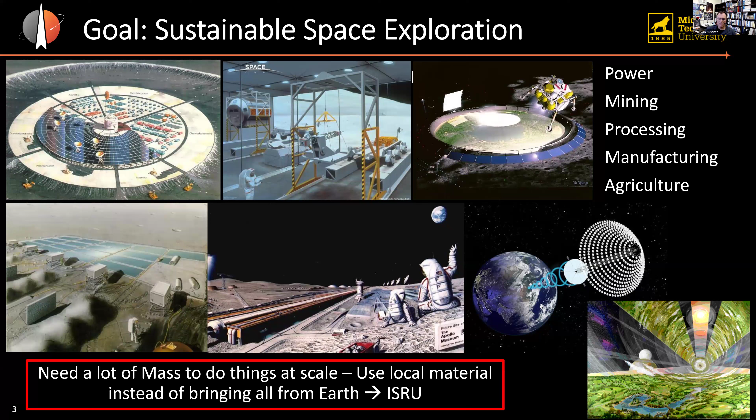And so to do that, we need to mine things, we need to extract things from it, process it, we need to manufacture components, and then of course, if we have permanent human presence, it would be great if we can grow our own food in those places as well. So lots of mass is needed to do all these activities that people envision. And so using the local materials is what we then call in situ resource utilization, or ISRU.

And of course, the activities that we're talking about are happening on the moon, but the first business is, of course, to get to the moon. There are lots of activities in that area taking place, lots of rockets being developed, lots of companies getting involved in the Artemis Accords and things like that. So the transportation side of things is a very active field, and lots of interesting things happen there.

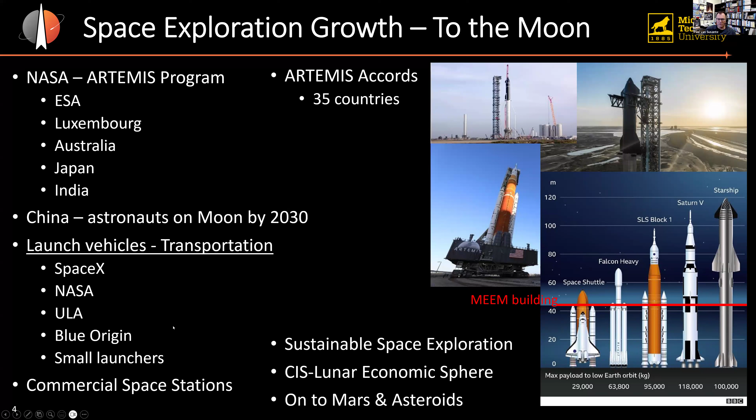I haven't personally seen Starship launch, but I always like to compare these massive rockets to the height of the tallest building in my area, which is the building I actually work in, and that's this red line. You can see these rockets are almost 3 times as tall as the tallest building in the area here. These are massive machines, large cargo capacity, very different in many ways than the small things we used to be able to launch to different places. So this is going to change the game in many ways.

Now, the sustainable part and also the economic part of that is always predicated on whether or not there is value to be had in those places. And value can be defined in several different ways, but the value of in situ resource utilization, I think, is often best expressed in sort of three different components.

One being independence, right? So think of it as a supply chain, and the supply chain now is shorter because you can make stuff locally. And in turn, that also means there's risk reduction because the supply chain is shorter. So if, for example, there's a leak in some sort of oxygen tank, and you'd have to wait 9 months for replenishment, that could be problematic.

But if you can just make some more, that greatly reduces risk for the mission and the people. So I think risk reduction is a huge one as well. And then in the long term, you also improve life on Earth by moving a bunch of industry off the planet.

But I think from a sustainability standpoint for the space program, I always like to think of it as money equals number of rockets launched, in a way. So if I have to launch fewer rockets, that means it costs less and I can do more for that program.

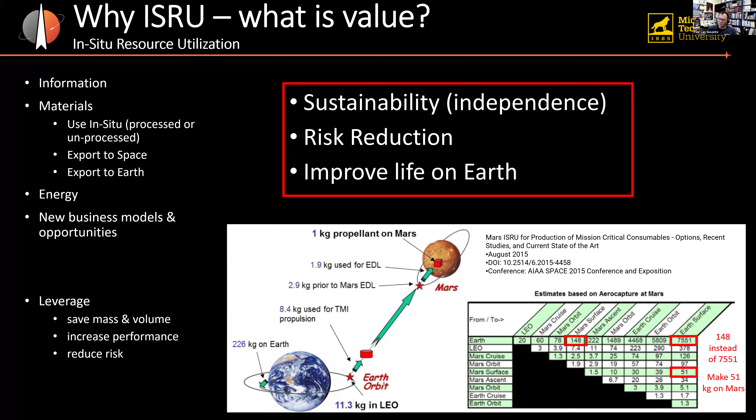And so that's where the sustainability part comes in. If I can make 51 kilograms of propellant on Mars, I can send that 1 kilogram back to Earth with material made on Mars. That saves a lot of rocket launches from Earth to then send it back from Mars. So that to me is really the value of ISRU — you greatly reduce the number of rockets you have to launch from Earth to go to other places in the solar system.

Then we're talking about rocket propellant, because propellant is the largest mass of the rockets. That's the delta-V needed to get to other places in the solar system, and it's the biggest mass of any rocket, basically. So where can you find that water?

Well, on the moon there are some cool places — literally very cool, in the sense that they're in the permanently shaded regions on both the north and south poles of the moon. In those places the sun never shines, and so they've accumulated water ice over the millennia and billions of years. That ice is in those permanently shaded craters. There, we could potentially extract it, electrolyze it, and then we have rocket propellant. So that is one of those near-term sources we could use to reduce the supply chain from Earth.

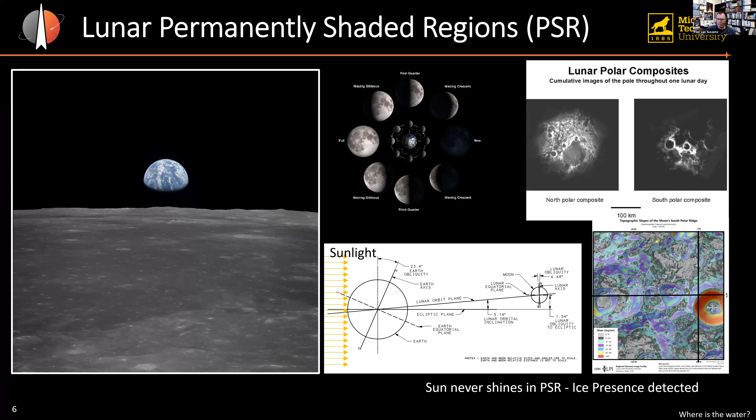Now, what value does that have? This is a plot from a study called the Commercial Lunar Propellant Architecture Study, done by ULA and others, including Colorado School of Mines. They studied the value of a kilogram of water from Earth in different places. If you have a value of water on Earth, it's very little, but depending on where you have to bring it, it costs a lot to bring it there, so the value of 1 kilogram of water goes up.

For example, on the moon, if I bring water from Earth, this study says it would cost $35,000 a kilogram. But if you can make it locally, this study says you can make water for $500 per kilogram. Look at that difference — that's a huge value proposition for a company. If I can make it for $500, and the value of bringing it from Earth is $35,000, let's say I sell it for $20,000. I still give NASA a discount of $15,000 a kilogram and still make $19,000 in profit, so to speak.

So this is why companies are very interested, and this is what the value of propellant is in many ways. Of course, the value changes depending on the location, because the cost from Earth is also different, so you need to take that into account if you want to sell it in other places.

But this is a huge thing, because if we can make propellant on the moon and then either bring it to other places and refuel, that allows us to not be limited to the supply chain from Earth and getting out of that huge gravity well. There's some very interesting things that allows. In a way, I like to think of it as it opens up the rest of the solar system. It really breaks down the limitations of the mass that we can send to other places.

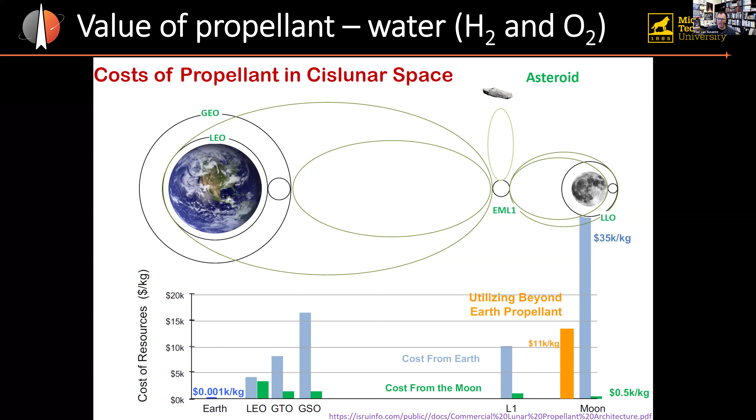Now, when you look at this at scale in the future, what does the growth need? We launch one rocket a year, a hundred rockets a year. NASA and others have studied these things. When you look at the future, we're talking about hundreds of tons, thousands of tons a year, and distance traveled of thousands of kilometers per year for the vehicles that need to do the excavation, et cetera. So we're talking very large scale.

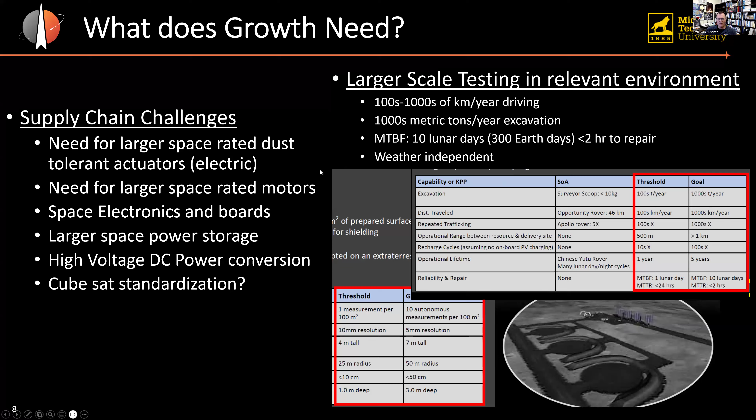And the challenge with that scale is that it's very different from what we're used to doing in space. For example, if you look at the space rovers that have gone to other planets and driven around on those planetary bodies, you can see on the right plot here that the Opportunity rover in 14 years drove about 45 to 50 kilometers. That's a nice distance, but it's not anywhere close to thousands of kilometers.

When we did some analysis on Mars and how we got water from rock, depending on what kind of material you were excavating, you may have to drive thousands of kilometers—in this case 1.5 years. So if you compare that 50 kilometers in 14 years to, let's say, 5,000 in 1.5 years, now we're talking orders of magnitude difference in how much performance the vehicles need to have.

Not to mention, these vehicles are literally digging in the dirt all the time, versus these science rovers that drive around very quietly, carefully, and touch maybe something here or there. They're very different kinds of vehicles, and those excavators that drive very long distances are what we're going to need to make this kind of future possible on the moon.

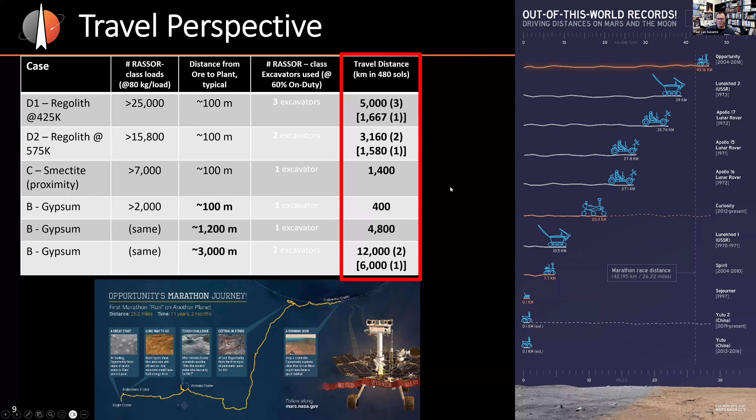And so this is where we get into what we do in my lab, because my lab was founded in 2019, and the goal here is to prototype, build, test, and quickly increase the technology readiness level of technology being developed to enable lunar and Mars missions, and then sustainable space exploration as I just talked about, and partner with whoever is interested in making that possible.

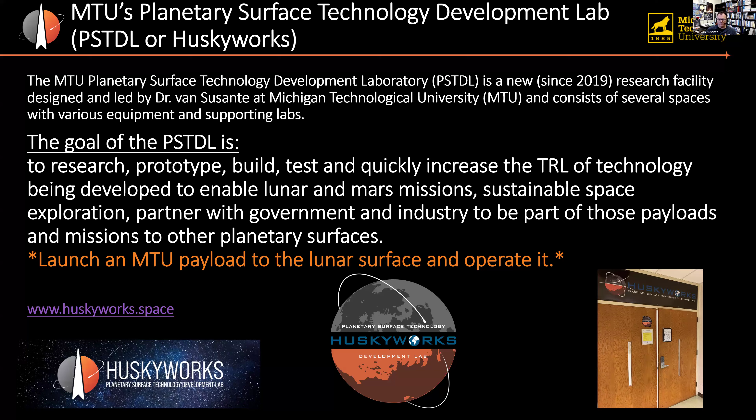And hopefully, by doing so, we would love to have our own Michigan Tech payload on a future mission sometime. One of the things that should be clear from this undertaking is that there are many different aspects that need to be developed, and we in my lab can't do all of those things, obviously, so we focus on some subtopics.

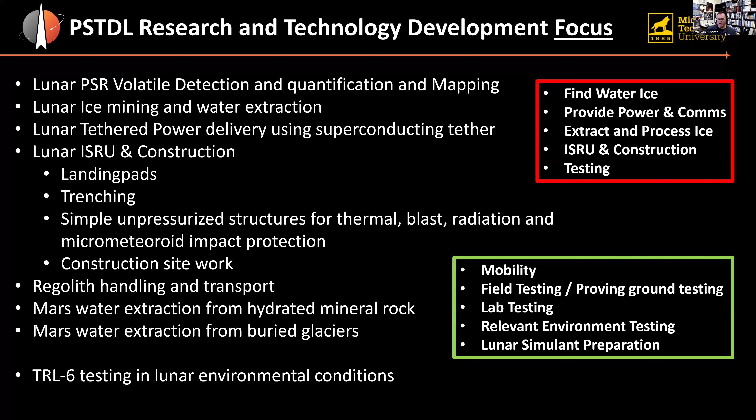For example, we focus on finding water ice, providing power and communications, extracting and processing the ice. We're doing in-situ resource utilization and construction—picking up the material and doing stuff with it. And it's very important to test these technologies. There's a variety of different things you need to be able to do that: mobility, field testing, lab testing equipment, relevant environment testing, and then, of course, to simulate the moon, you also need the lunar environment and lunar simulant.

In my lab, we focus very much on TRL 1 to TRL 6, so all the way from the idea to testing it in a relevant environment, a space environment, before you would send it into space. We do a variety of things, particularly in-situ measurement of volatiles and geotechnical properties, very important as initial missions to map where we could do excavation of ice, where the ice is, how much is there, how deep it's buried, and how hard it is to get out.

And if you know that information, you can design better excavators and material handling systems. You've got to do construction and compaction if you're going to build roads and landing pads for that permanent presence, the infrastructure you need to do these things.

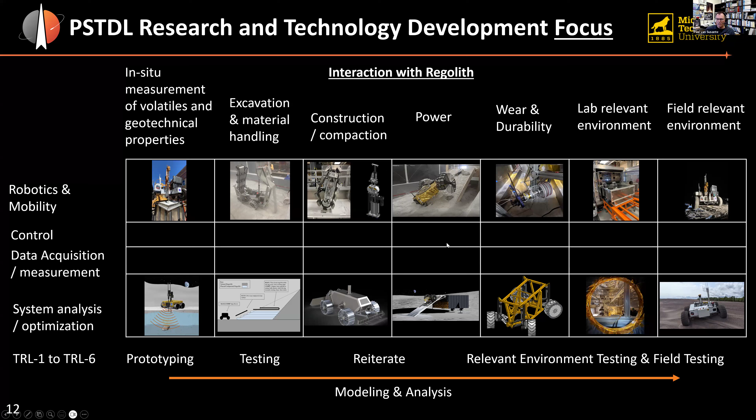We do that testing in the lab in the relevant environments, but we also do it in the field. There's a variety of different things we've been working on, and these pictures you see are all from our tests here.

And of course, we partner with a lot of companies and other universities along the way. In total, we've been able to get about $5 million in funding over the past several years to do a lot of different projects.

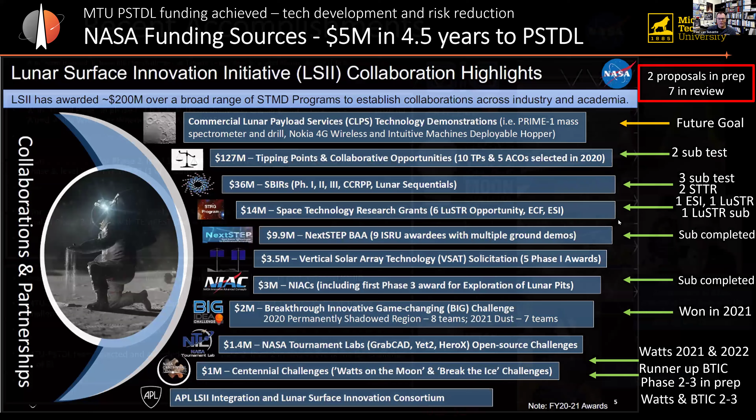We're now three rounds in, and in the final round of Watts on the Moon. Likewise, for the NASA Break the Ice Challenge, the Centennial Challenge, we're also now in the final round of that competition. Both will happen this summer. This has given us about $1 million in prize money and winnings to further develop these technologies, both for power storage and transfer, as well as excavating cemented icy regolith. I'll talk more about those in a bit.

My lab consists of many different people working in it. So I'm talking to you, but the accomplishments I'm describing are done by a lot of students. I have 35 funded undergrad and grad students, and sometimes students who work for credit as well. I have 2 research engineers working in my lab, and we take a very interdisciplinary approach, including computer science, electrical engineering, geological mining engineering, civil engineering, et cetera.

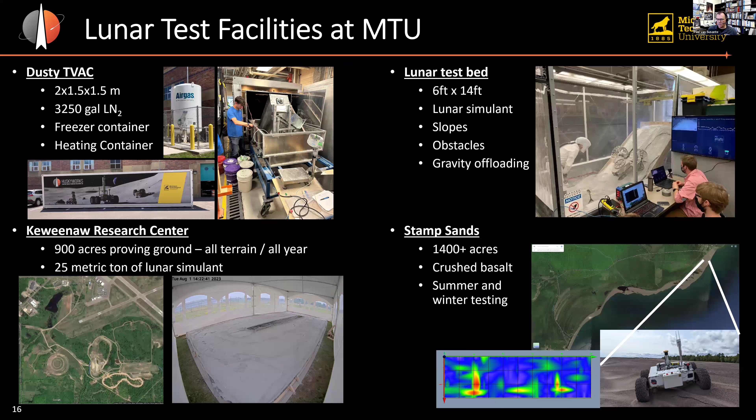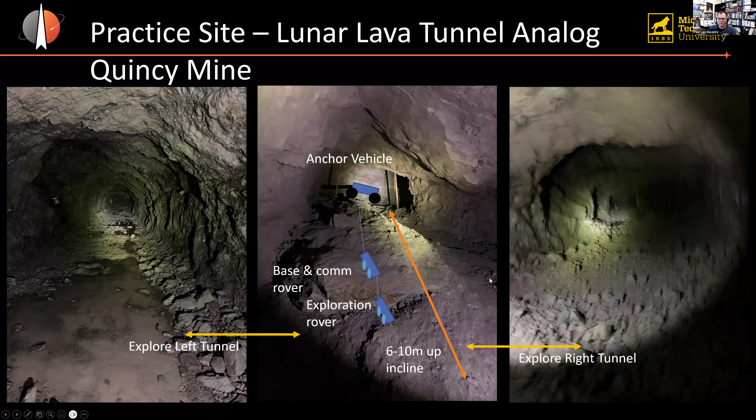It's a pretty exciting underground lava tube alternative where you're not in a national park, so you don't have to be very careful — you want to put a rock bolt in, no problem. It's also safely inspected because it's open to tourists, so it's a very safe, well-known place to work.

Here you can see some other things. This area is at a slope, so you could have an anchor vehicle and drive your vehicles down in it. There's some interesting things we've been working on to explore underground facilities that way.

A little more detail about some of these things. The Lunar Simulant Sandbox isn't huge, but it is a nice size — 14 foot by 6 foot, and 1 foot deep. We can do excavation testing with our Lunabotics rovers, for example.

In this case, we had built a slope simulating a crater slope where we would be driving down, and this vehicle can drive down a 45-degree slope over obstacles like this while deploying a cable behind it — in this case, power and communications. You can see some more testing going on here.

The other capability this sandbox has is a gravity offloading system in place, so that we can simulate lunar gravity in the somewhat limited way of gravity offloading, but it still does a pretty good job with the traction side of things.

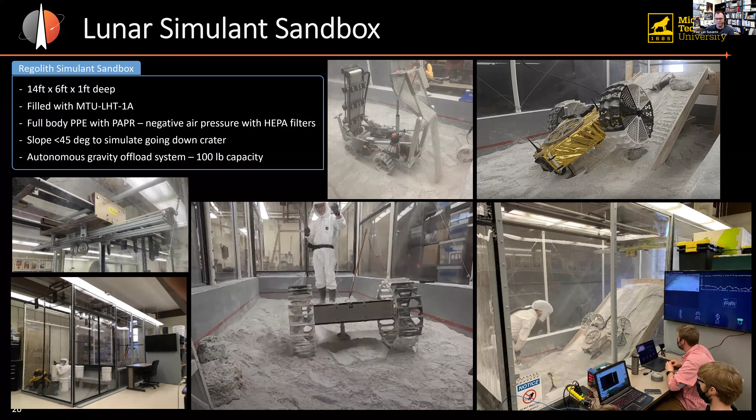Now, this, of course, is in an atmosphere — still a relevant environment relating to the simulant. The traction and other kinds of tests, like obstacle stability and things like that, are pretty interesting to do tests in 1G with.

Nevertheless, it gives us a good idea of how the vehicles behave in lunar simulant. This is a very important thing because, for example, in the Lunabotics competition, one of the major challenges is for the vehicles not to get stuck. So we can practice that in the simulant, and it helps a lot in the final performance of the vehicle.

Like I said, we need simulant, and we needed a lot of it, so about 30,000 to 35,000 kilograms. So we made our own using the same ingredients as, for example, Exolith Lab, or whatever it's renamed now, what it's called.

So the green spar, 90 and 250, and we had crushed basalt that we mixed in, and the green dots here are the resulting particle size distribution, which is right in between the Apollo sample particle size distribution. So we have a very nice particle size distribution. They are all crushed materials, so angular as well. It has very good geotechnical properties. But the nice thing is we can make it for about $3 to $4 per kilogram, so that allows us to keep the cost manageable.

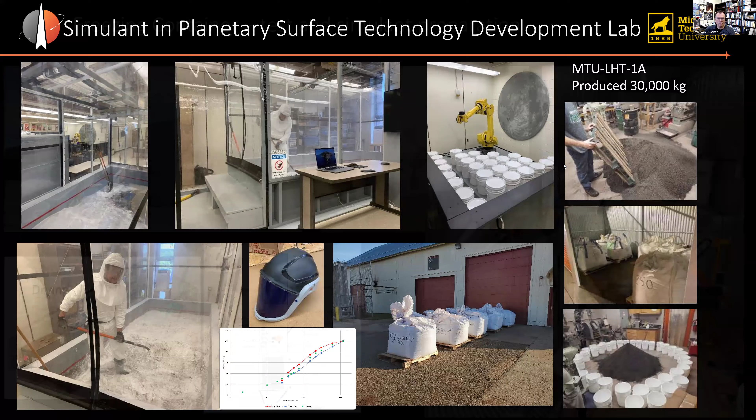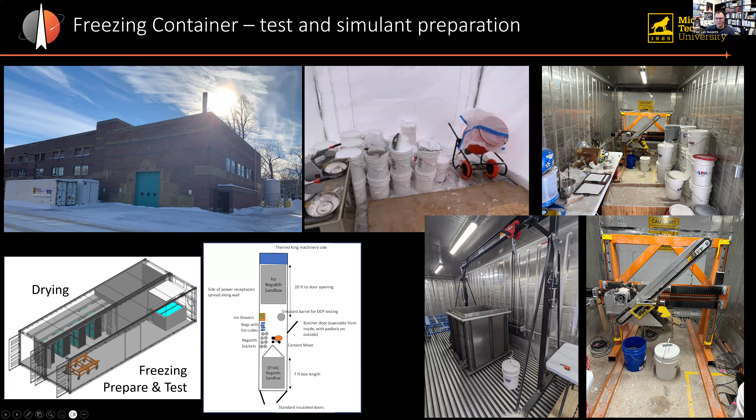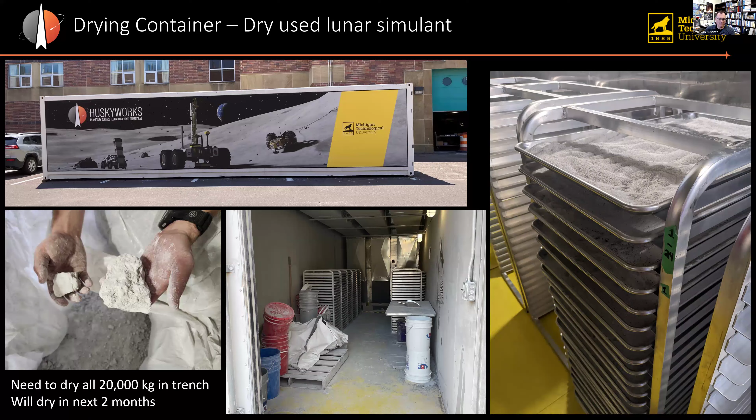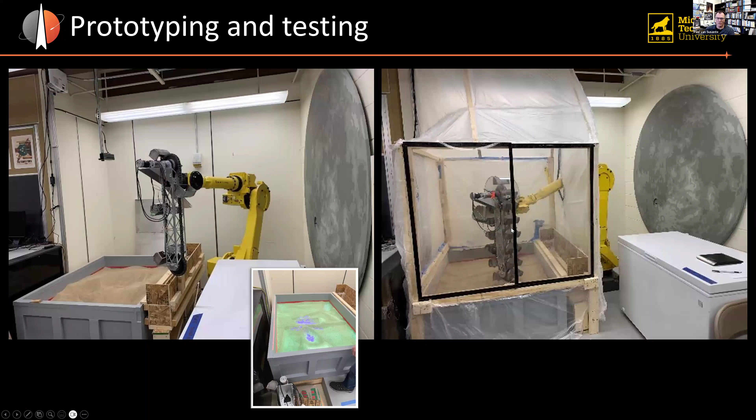So let's talk a little bit more about prototyping and testing. Once you have an excavator, it's great to have one, but you need to attach it to something. We don't really want to have a large vehicle running around the lab, so we have a robot arm that we can attach the excavator to, and then we can do initial testing just to see how well it works. You see a first iteration on the left and a second iteration on the right, with some dust control mitigation issues and other things addressed since then.

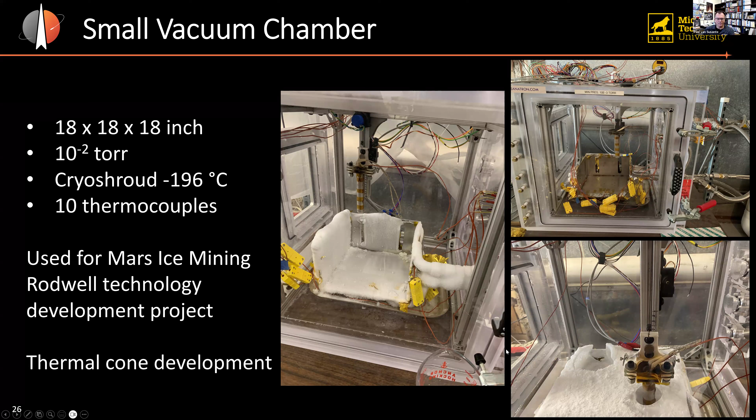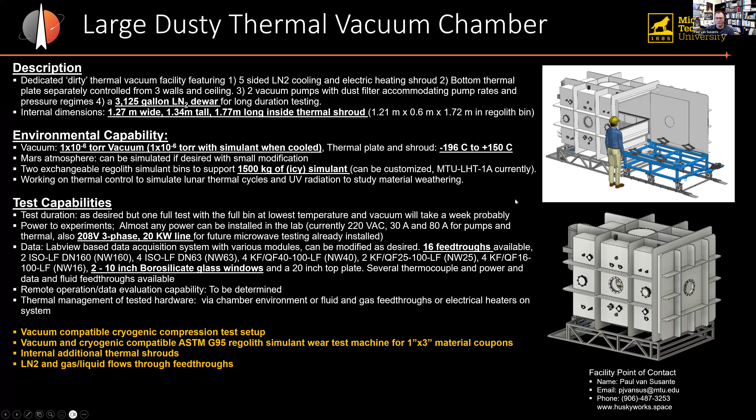Couple more highlights. It's a reasonable size on the inside, about 1.27 meters wide, 1.34 meters tall, and about 1.7 meters long. It can go down to 10 to the negative 6 torr vacuum, with simulant inside of it. The thermal plate and shroud can be cooled with liquid nitrogen to minus 196, or heated electrically up to 150 degrees Celsius.

So it allows us to do thermal cycling as well. Got lots of feed-throughs and ports. The liquid nitrogen tank we have is about 3,000 gallons, which typically can last about a week if we do cold testing and need to keep it constantly cold. But that's of course dependent on the heat load inside.

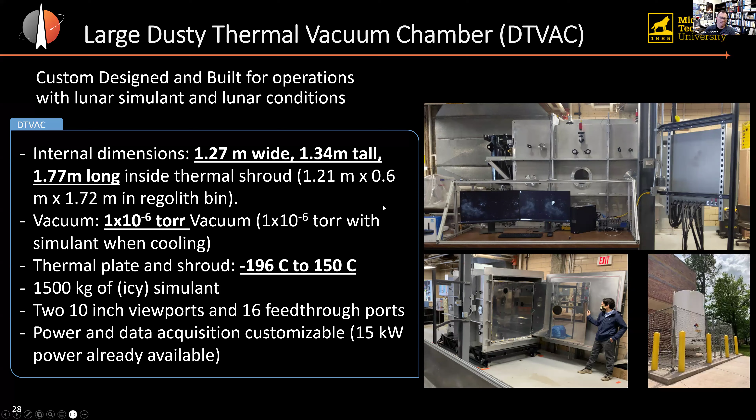Some close-ups - we have a roughing pump, turbo pump, and filter. We have two-circuit thermal shrouds, so we can control the bottom plate thermally, separately from the walls. That allows you to have a cold bottom with icy regolith, for example, yet a hot shroud for simulating the lunar day.

We also can feed liquid nitrogen and other gases into the chamber for localized additional cooling if needed. We have lots of power available in this space, 20 kilowatts of external power we can feed into the chamber for specific tests, things like melting regolith or something like that.

We have a programmable power supply and load. We do a lot of our electrical tests with that, lots of thermocouples and other data acquisition and control systems to go with this chamber. So it's a pretty cool facility to play with, which we do all the time.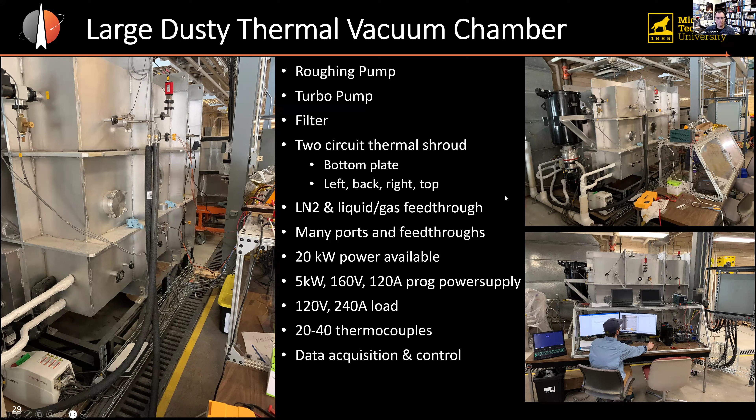Some examples of that - we've looked at vacuum regolith conveyance, so how does conveyance differ in vacuum from under atmospheric conditions? For example, regolith flow in hoppers. When you have a process like molten regolith electrolysis, you don't want to just dump directly from your bulldozer or excavator right into the reactor. Typically you deposit it in a hopper, and the hopper feeds it at a specific rate into your reactor. So the question is, how well does that flow work?

And if I do tests under atmospheric conditions, is that representative of the vacuum condition or not? So we've done these tests in vacuum as well as in atmosphere to test the differences.

I was talking about wear earlier, and we've also designed, built, and used an ASTM G65 wear testing machine that works in the vacuum chamber, where we can test various material coupons under a very defined load, with lunar regolith being dribbled onto it for a given amount of time and pressure. Then you can study the wear characteristics of material under lunar conditions.

The samples can be cryogenically cooled, so they are at lunar temperatures. We have the lunar simulant being dribbled by, or whatever material you want, and that simulates wear over long periods of time. We also designed and built a vacuum-rated direct shear test - this whole apparatus can go in a vacuum chamber. We can determine geotechnical properties of lunar simulant under vacuum conditions, including icy material as well.

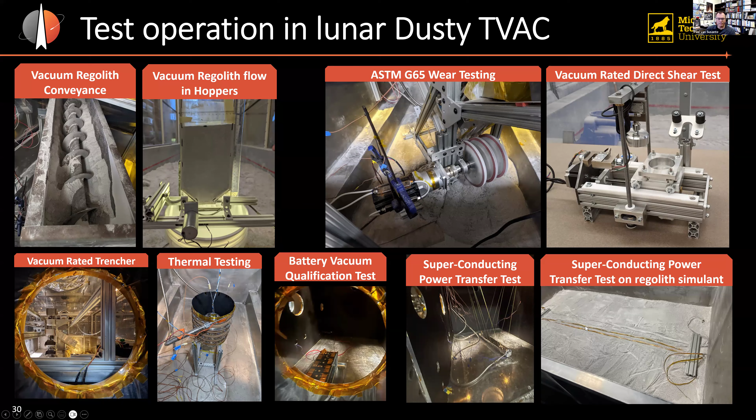Other research we've been working on includes extracting water from Mars gypsum. It's an alternative source of water. It doesn't have to come necessarily from water ice, like glaciers. It could be bound in the mineral in the rock, such as in gypsum.

Deploying cables for power down 45-degree slopes, very difficult terrain. Measuring the geotechnical properties and volatile content down to 1 meter depth with a cone penetrometer. We've done field tests, as you can see, with these rovers that we've built, excavating cemented material, long distance driving on lunar simulant as well, talking about traction and how the road holds up, for example. Those are the things that we've done.

We also did vacuum excavation testing, and this is, as far as I know, the first excavator that was ever used in a vacuum chamber. So we've got a bunch of data on how the excavation occurs and how it's different in atmosphere versus vacuum.

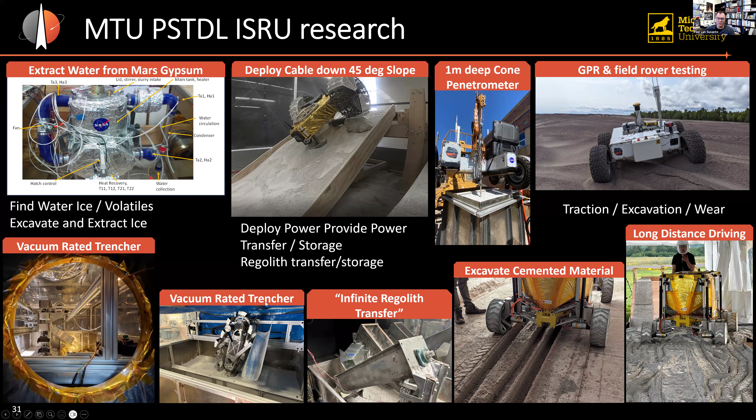Some more details about some of these projects that we've been working on. One that we are very interested in is lunar excavation testing. We work with simulant, but also with cemented ice, or the alternative, like controlled low strength material, the weak concrete, or for example, gypsum excavation as well.

One of the things we're very interested in is using bucket ladders. They have small scoops, which means small excavation forces, and there are a lot of them. So you have a high production excavation capacity, yet small excavation forces because of reduced gravity. Both of those are a good thing.

We have our own bucket ladder here, and we have one from an old SBIR project that we want to mount on this vehicle. We want to go dig a 1 meter deep trench and see how our bucket ladders hold up. We've tested them in the vacuum, and now we want to test them in the field as well.

The excavation test bed in the freezer container lets us really explore the icy regolith, whether cemented or not, and how the excavation systems hold up with cold cemented material. This measures the excavation forces in the 3 directions while we are excavating the various materials.

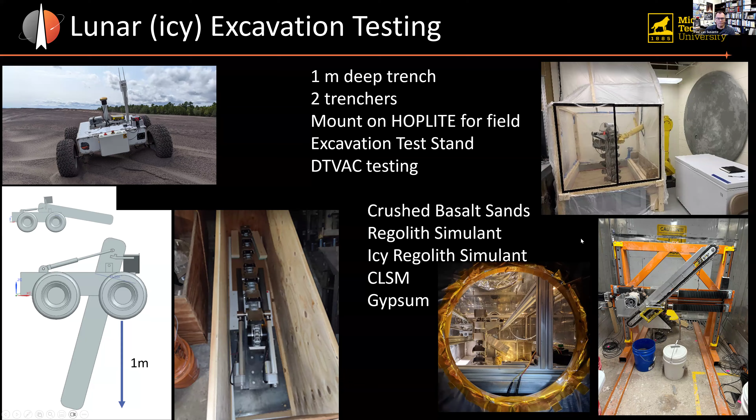Then water mining and extraction on Mars—I already mentioned the gypsum here. We've done work disintegrating the gypsum with, in this case, a water jet, sucking up the slurry, the mix of water and gypsum powder, and then putting that in a reactor to heat up and extract the water from the mineral as well as the liquid water from the water jets, and recover it all. That whole process we have tested and brought to about TRL4.

But we've also looked at extracting water from buried glaciers together with Honeybee Robotics. We were looking at the melt efficiency and drill efficiency of melt probes under Mars conditions. You can see some of that work on the left.

Then the big project here, which is our LuSTR grant: a percussive hot cone penetrometer and ground penetrating radar for the purpose of geotechnical and volatile quantification and mapping. This is intended to determine how hard it is to excavate the lunar material, and to map and detect how many volatiles and which kind of volatiles are embedded in the regolith. There are different aspects to this.

We have the geotechnical aspect, where we measure the forces on this cone as it gets percussed into the ground. You can see a data example here where you measure the resistance as you go down, and that translates into regolith geotechnical properties.

At the same time, we stop every 10 centimeters, heat up this cone, and collect thermal profiles. From those thermal profiles, we can infer whether or not there is a volatile mixed in, or whether it's dry. You need to combine that with geotechnical information, because you need to know the relative density of the material, since that greatly affects the thermal properties. The combination of the thermal data and the geotechnical data is what allows you to uniquely identify whether there are volatiles in the regolith, or if it's just less compact material.

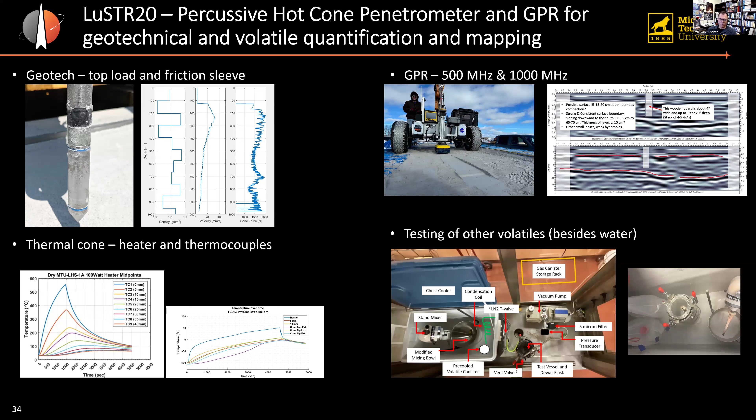The full system was designed to do both the geotechnical measurements and the thermal system. Just this past couple of weeks, we've done our final tests for this project. As you can see here, we have this big bin created with different layers in it.

So it's icy regolith and things like that. This example was dry regolith at the bottom, 3% ice in the center layer, and dry again at the top. Then we did a big thermal test in the center — 10 centimeters, do a thermal test, another 10 centimeters, do a thermal test — and then a lot more geotechnical tests around that, because the thermal tests take a long time to do. So overnight it takes to do all of these tests in one time.

Then we did a large field test, as the full system is not just in the box, but also drives around with the GPR. We did that at the Keweenaw Research Center, where we built a relatively large trench, 7 meters long, 1.2 meters high, and 1.5 meters wide.

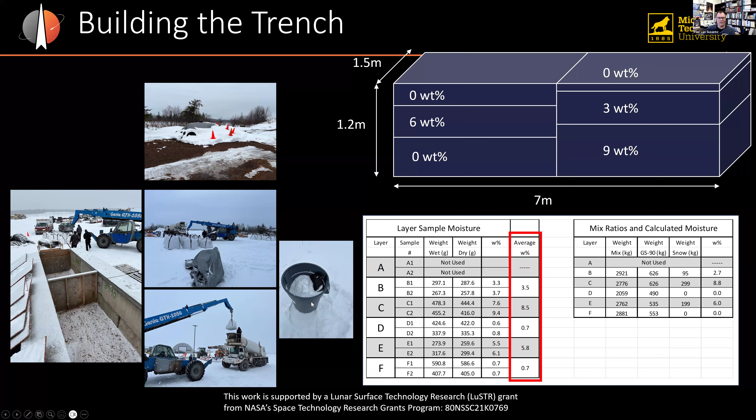We mixed the regolith with the ice. In this case, these were fresh fallen snowflakes, which are very fine, which is really nice. Then we filled the test bed — as you can see here, we have one zone being filled, just mixed in a cement truck.

Then the simulant gets deposited in layers, in different mixes with different water contents, and then compacted. We were experimenting with different compaction methods, and that, I can tell you, is very challenging to do. But anyway, we succeeded in making all the layers we wanted, and then we were ready to do our testing.

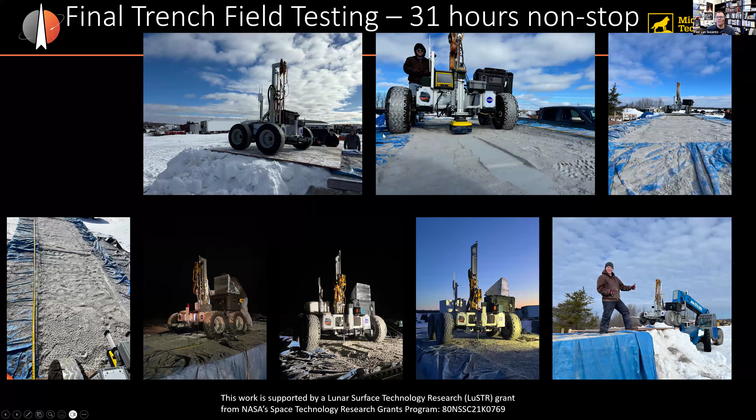Now, unfortunately, the winter this year was the hottest one on record, and we only had 4 days in a row where it was cold enough here to do this test. So we made the box on Friday with all the layers, and then we had 31 hours nonstop to do this test before the temperature rose above freezing again and our ice would start to melt. So 31 hours nonstop, we worked through the night.

We had our ground penetrating radar test set up here where we drove over the trench, and we had our cone penetrometer also mounted on here. So we then did our cone penetrometer and thermal testing as well. Like I said, we worked 31 hours nonstop to get all the test data we could before it got too warm again. And then you can see sunrise here — we survived the night. It's a little different than on the moon, but we did survive the night.

After 31 hours of testing, we got it done right before things started to be too warm.

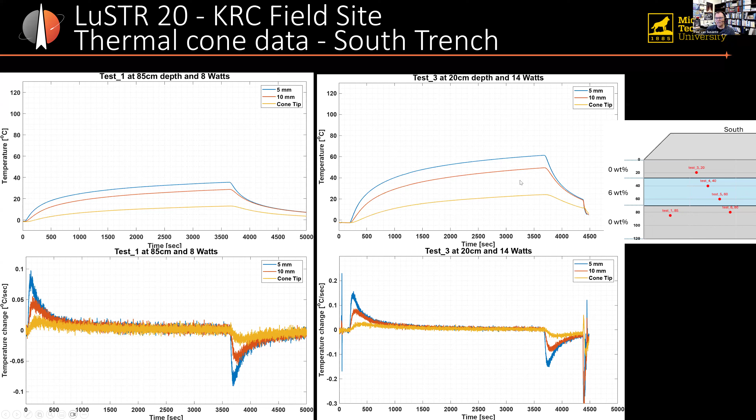Then we have some examples here of our test data from our thermal data, different locations, different depths, and different ice contents. We're still processing all this data to see how it looks, but the data looks good, the data looks clean, and so we're very excited to get all that data.

Compile the results. All right, switching to another project, the autonomous landing pad construction, where Michigan Tech is a subcontract to the Colorado School of Mines, who is in charge of the Aspect rover, and we are focusing on the compaction side of the landing pad construction.

We have designed and built a test setup that allows us to compact lunar regolith down to 30 centimeters depth in one go. Depending on the starting condition of the regolith, we're able to get very close - these are just preliminary results - to 90% relative density, which is the desired target. With some tweaking and further testing, we are confident we can achieve 90% relative density with this compaction method.

A little bit more about Watts on the Moon, the competition. The idea here is to provide power from a power plant on a crater rim down into the permanently shaded region where you would be extracting and mining ice. Our idea was to use a superconducting cable, because in the permanently shaded crater it's cold enough to go below the critical temperature.

So we can use a superconducting cable to transfer power over kilometers of distance without any losses. That means you can use a very light cable because there's no resistance in it. It also means there's no heat generation in the cable because of that, so a very thin cable is sufficient for that purpose.

This is part of what T-Rex was doing, but then we used that design in the Watts on the Moon challenge, for power transfer to a plant in this case. We got pretty good watts per kilogram transferred - if you use a superconducting tether, the efficiency of watts per kilogram transferred is really high compared to, let's say, only a conventional tether made out of aluminum. That's a big difference in efficiency of power transfer.

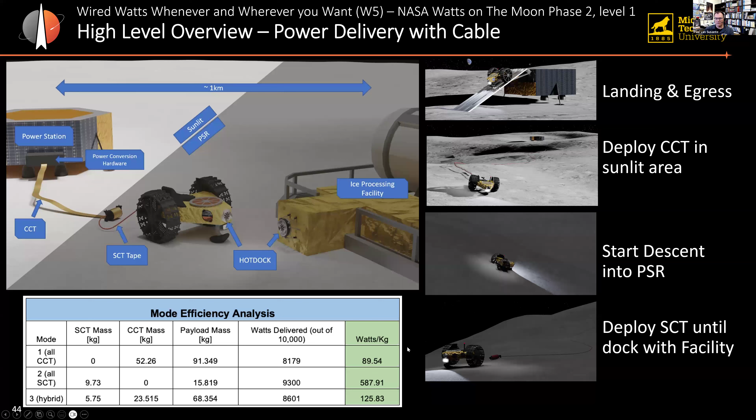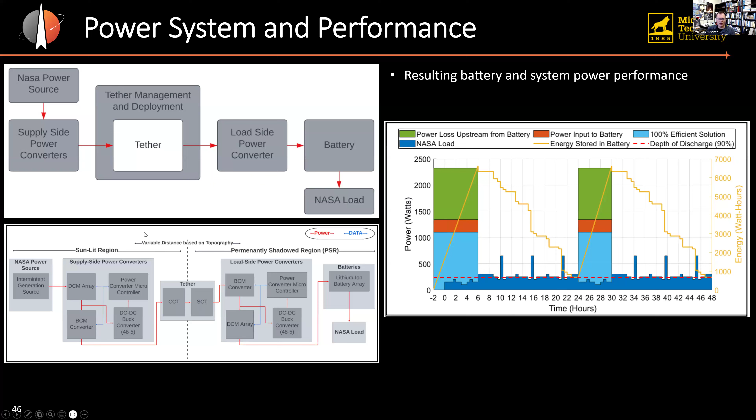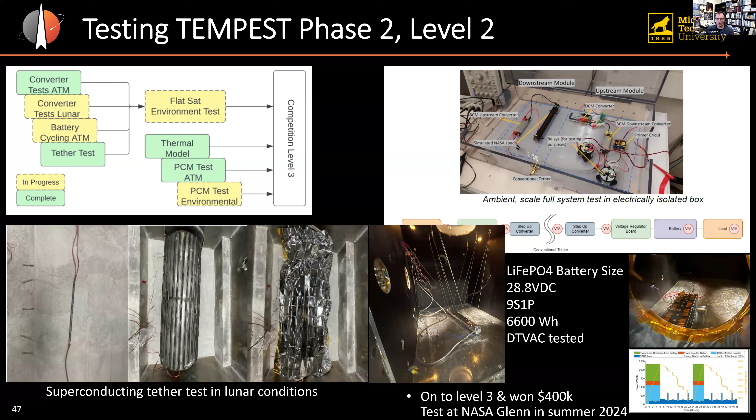During the final round, the thermal aspect becomes very important because it will go in a liquid nitrogen cooled vacuum chamber, so our system needs to operate properly under those conditions. We've been testing that power, but especially the thermal design of this system. I'm not going to tell you all the secrets today, you'll have to wait until after the competition to learn more.

Then the Break the Ice Challenge, the last part I wanted to cover here. This is our phase 2, level 2 prototype called Primrose, which did the durability demonstration test where we are targeting 800 kilograms of excavation per day and driving 500 meters between excavation site and deposition site, doing that for 15 days nonstop. This is a full-scale, full-size system, which, if it functions at 800 kilograms a day, is enough to actually refuel a rocket on the lunar surface. So this is essentially a full-scale demonstration of an ice mining system on the moon.

The durability demonstration testing required a proving ground to be built so we could actually do that testing. Here you can see a picture of the tent city that we built with the excavation tent, the driving tent with the lunar simulant in the top right, and our deposition tent on the right. We deposited 16,000 kilograms of simulant here that we needed to drive on, which was our version of the lunar surface. As far as I know, we're the only ones that drove on lunar simulant for the entire duration. The excavation area was specified by NASA to contain controlled low-strength material, basically very weak concrete but cemented material. This whole area was staffed 24/7 for 15 days by students on the team.

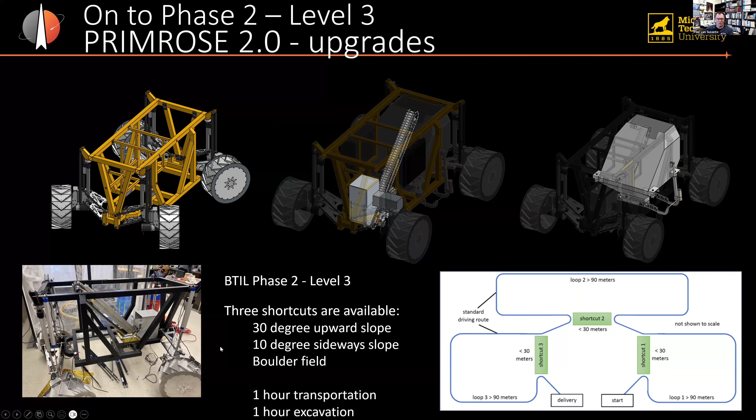We have to excavate for one hour and fill up our entire system. We now have an improved excavation and material handling system, improved storage and release system, and a much more robust driving system so we don't get stuck like we did in the lunar simulant. Here's the updated chassis that's ready to go. The control system is now fully implemented, and we're in the process of testing our system right now.

As a final slide, what are our next steps and future ambitions? NASA has ISRU missions planned, and we have a lot of technology development related to NASA mission objectives that can directly fulfill some of them. We're also training many students with space hardware experience who are in high demand with our partner companies to hire afterward, which is really the main product of a university: educated students. Our goal is to be part of a lunar surface technology mission to demonstrate, and then help companies really use that technology in the long run.

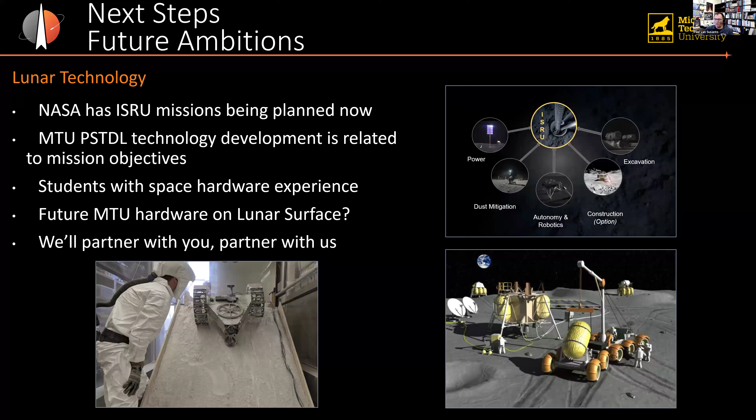Thank you very much, great talk Paul. Really cool work. I'm looking at the Q&A and don't see anything, so I'll jump in with a question myself, with two parts.

For your Break the Ice Lunar Challenge, when you were driving back and forth over that same area—3 kilometers, that's a lot, or 30 kilometers, that's a lot, really well done—did you notice wheel slip every time you went back and forth across it? Did that frequency increase with time? How did performance go as you drove more across it?

That's a great question, so the answer is it depends. There are a couple things we noticed. One, there is air trapped in the regolith, and it actually changes the behavior quite a lot. When it's loose and fluffy—and you've worked in regolith boxes as well—it almost becomes liquid, where you have a big hole that then collapses in. So you have to be very careful. It's almost like quicksand in a way, except that you just sink to the bottom and don't float. So it's pretty tricky in that sense.

One challenge we noticed was with our wheel design. You can see the V shape of the grousers here. Depending on the direction we drove, the V shape would essentially trap air when it went down into the regolith, and then there would be a big poof of regolith coming out when that air got pushed out. That obviously doesn't happen in a vacuum, so the behavior is actually fairly different in that sense.

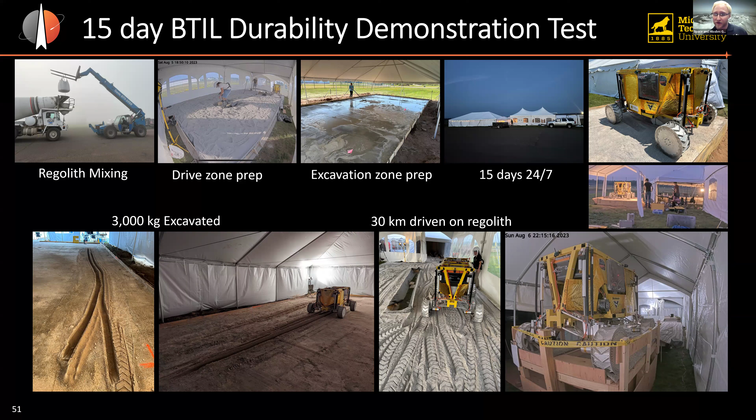Yes, I can. Let me see if I can go back to that slide. But the gypsum is an interesting material. You may know that we make drywall out of that here on Earth.

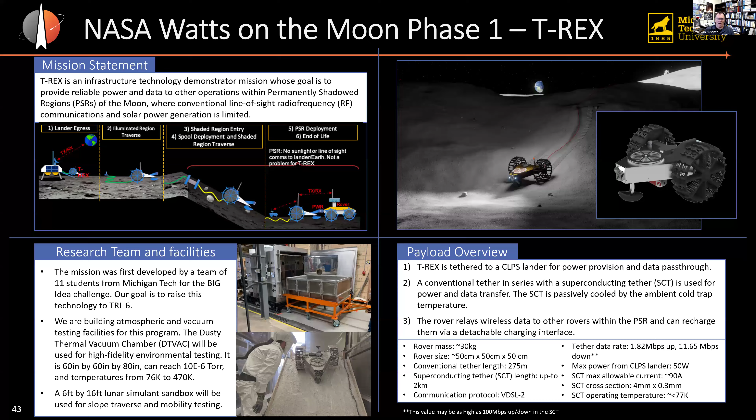The idea with the gypsum is that it has 20% water by weight in it. And that water is not liquid water like groundwater. It is actually physically bound in the mineral structure. So it is part of the rock, right?

So like you create a cast here on Earth, right? You start with plaster, you mix water in it, and it hardens back into gypsum rock, in this case around your leg or whatever, to keep it in place. But the rock in nature has 20% water in it, assuming it's fully hydrated, which does occur and has been detected on Mars too.

The nice thing about gypsum is that water comes off at a relatively low temperature, between 150 and 210 degrees Celsius. That is much lower than other minerals, like clays, which have more water but need to go to 400 or even 700 degrees Celsius to break that bond. So gypsum is very nice in that sense.

It's a very soft rock, about 30 megapascal maximum compressive strength, and has a low temperature to drive off the water. So it's a very good candidate to extract water on Mars from a rock if for whatever reason we can't get to the ice, right? Maybe it's too hard to drill down to, although Honeybee has kind of solved that.

But there might be planetary protection reasons we can't use that ice or liquid water. In that case, being able to extract water from rock as an alternative is a viable means to do so. This technology disintegrates the rock using a water jet, making a slurry and powder.